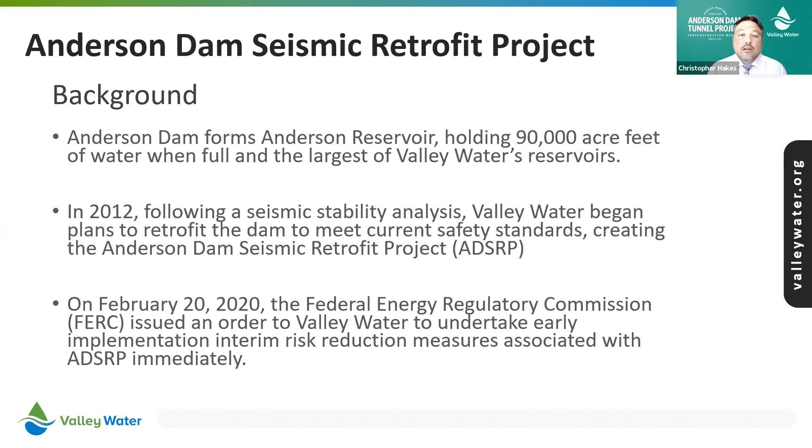I'll cover that soon. The project all changed, kind of accelerated a bit and kind of split in two on February 20th of 2020, when the Federal Energy Regulatory Commission, who is our federal dam safety regulator, issued an order, which I'll cover in a couple slides from now.

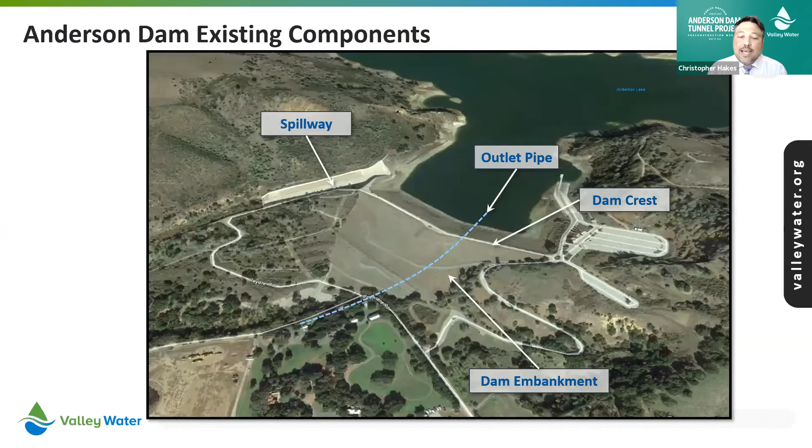It's like trying to maintain your reservoir level. If you thought your reservoir was a big 55-gallon garbage can and your outlet pipe was just a tiny little straw, it's not very effective. So as that's the case, we'll be addressing that as part of this project. The dam embankment there is the earthen portion of the dam. Basically, the dam crest is just the road that goes across the top of the dam.

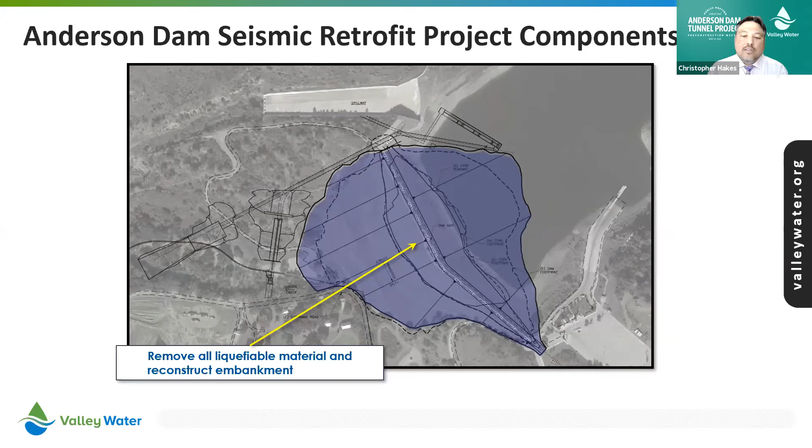So what are we doing in the seismic retrofit project? As I said, initially, we were just going to add some material to the upstream and downstream faces. After 2016, we determined that that was not possible. We're actually going to remove all of the embankment that is liquefiable. So we'll take off all of that soil down to the clay core, which is impenetrable from water, and we'll replace it with suitable material.

We're also going to replace our spillway in its entirety. That was originally not the case. In 2013, we were just going to patch the spillway in place, raise the walls a little bit. But after 2017, some of you may have been familiar with Oroville Dam. They had a catastrophic spillway failure. After that, the Division of Safety of Dams for the state of California kind of looked at all of their spillway design criteria, updated that a bit, and as a result, we are going to replace our spillway in its entirety.

We'll be installing a low-level outlet pipe. Eventually, this pipe will be able to transmit about 6,000 CFS, which is about 12 times the capacity of the existing pipe. But in the interim condition, we're going to limit its capacity to about 2,000 CFS, so about 4 times the capacity.

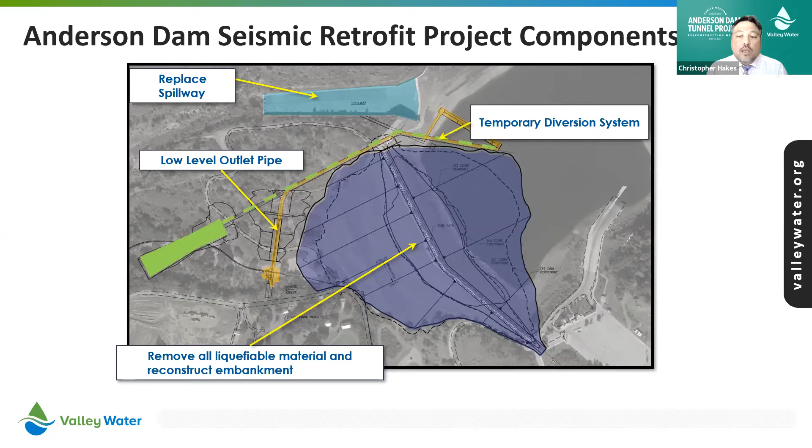As you can see, this pipeline will actually run around the dam embankment through the abutment. That will help prevent any sort of deformations of the dam embankment damaging the outlet pipe. So unlike the existing outlet pipe, which is right under the middle of the embankment, where if the embankment settles, that pipeline will get damaged, this one should remain intact. We'll temporarily put a diversion system in order to drain the dam to construct the embankment improvements.

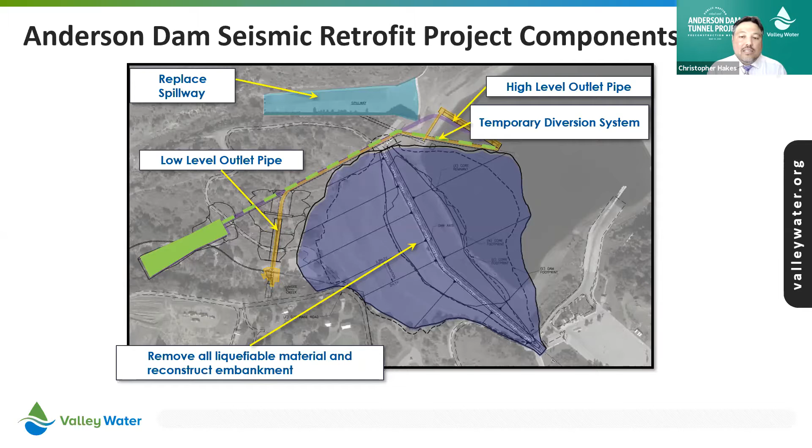And then, of course, we're installing a high-level outlet pipe. One of the advances since 1950 is the requirement from the Division of Safety of Dams, DSOD, for a high-level outlet pipe. This pipe will be able to discharge about 30% of the capacity of the reservoir in 7 days in the event of an emergency, as directed by the Division of Safety of Dams.

So what happened on February 20th? Because of Oroville and the latent risk that FERC, the Federal Energy Regulatory Commission, perceived with the potential for Anderson to fill up, they saw that it did fill up in 2017 and activated the spillway. That's actually how it's designed. It's what we call a fill and spill reservoir. About every 9-10 years or so, the dam will actually fill up and activate the spillway. That's not unusual, and that's not a failure. It's actually acting as it should.

But the potential for the reservoir to get all the way up to its spillway and then an earthquake to happen basically made FERC a bit nervous. They thought that was just too much risk for the downstream community. They had just seen what happened at Oroville. They wanted to go into a very conservative mode.

As a result, they lowered our seismic restriction, which was originally at 592 feet elevation, about 58% of the capacity. It had been there since 2009. They lowered it down to elevation 565, which is about 35% of capacity. That wasn't a big deal. We were in winter operations mode, so we were already at that elevation or lower, because in our winter operations we keep a little extra space for any water that may come in from storms.

The next component was to actually drain it all the way from 565 to 488. That's about 3% of capacity, and that's basically the lowest level that we can drain through the existing outlet pipe. We began that on October 1 of 2020, and by mid-December we were down at our 3% level, which is where we are right now. We might actually be just a bit lower.

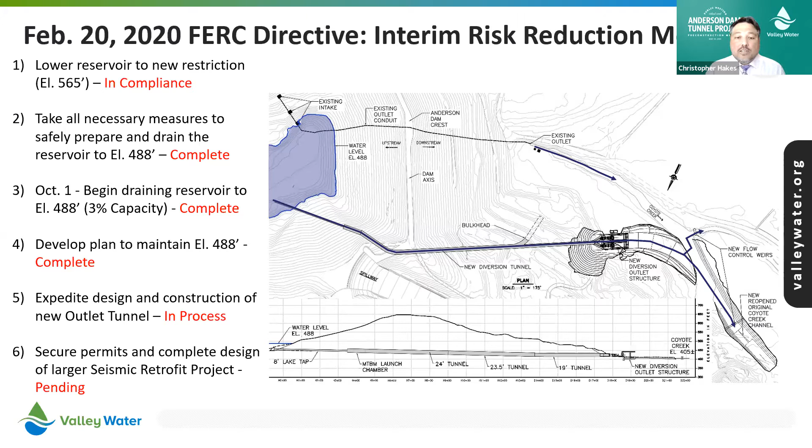So, as a result of that February 2020 action, the district created a new project called the FERC Order Compliance Project. It actually has 11 separate elements, 4 of which are actual construction projects. We'll be talking about one of them today, the Anderson Dam Tunnel construction, which will begin in late spring, basically June. We're going to start groundbreaking in June.

We have awarded our contract to a contractor, Flatiron West, and I've got a slide a little later that shows you their logo. We expect that the contractor will be on site mobilizing in the June timeframe.

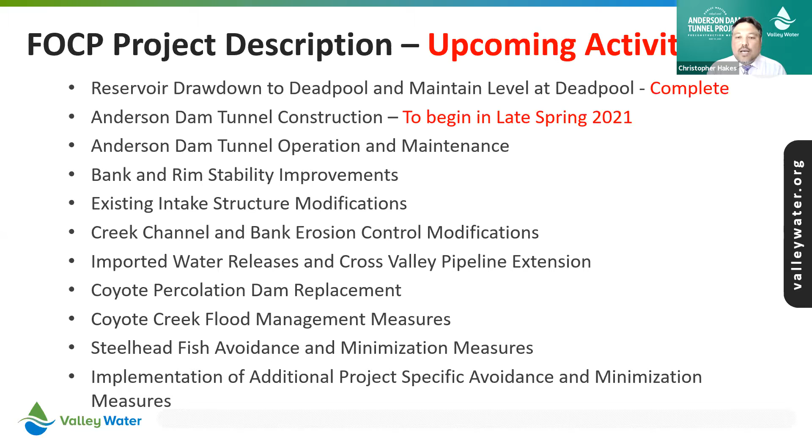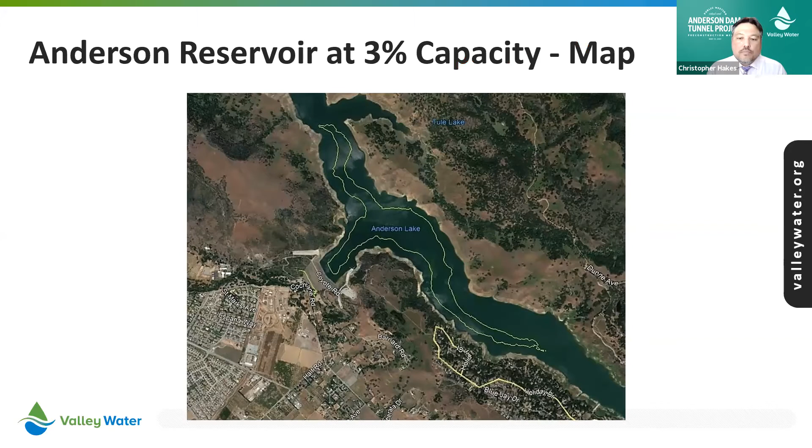One of the impacts of both the tunnel project and the overall seismic retrofit project is that there will be no boating. No water, or 3% of water, equals no boating, and that will be for the duration of both projects, so about 10 years.

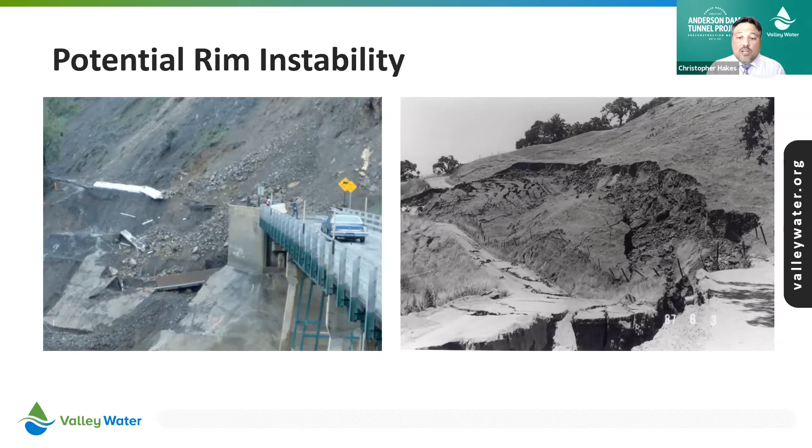Depending on the rate at which we draw water out of the reservoir, there also is the potential for rim instability, landslides. This picture is from 1987, the last time we emptied the reservoir. This time we held it at a net 100 CFS discharge. That was able to equalize some of those pore pressures and prevent some of those landslides. We also intend to go in this summer as part of the Anderson Dam Tunnel project to do some stability measures along here.

Some potential impacts residents may see: after storm events, because our outlet is open, the water level will rise temporarily in the reservoir. Of course, there's no rain forecasted anytime soon, so this is something that you won't see until fall or winter most likely. So you will get some increased flows after storm events.

You'll hear noise from construction equipment, large diesel engines, backup alarms. Sometimes if you are in close vicinity, those alarms can get rather cumbersome, and there are alternate alarms. I've heard at some sites they use what basically is a duck call, but even a duck call will get annoying if you hear it enough.

The work activities will be basically Monday through Friday during the day, kind of 8 to 5 sort of deals. There'll be some Saturday work, and if we do fall behind schedule for any reason, we will extend those work hours. We'll potentially work Sundays. Generally, a notice will go out to the public if those things are happening.

You can also expect some dust from the trucks that are driving along Cochrane. It shouldn't be too bad. There's no one right next to that road; the Borrello estates are a little bit off of that. So because we're digging a tunnel in the other abutment that's away from the roadway, we expect a lot of that noise and dust to be contained within the tunnel itself.

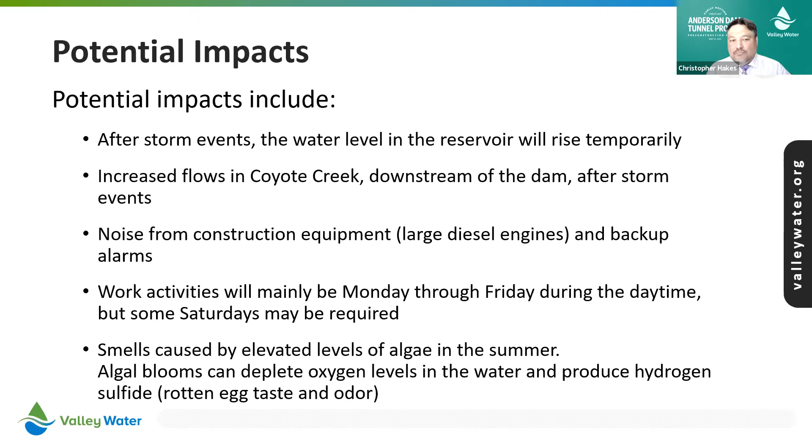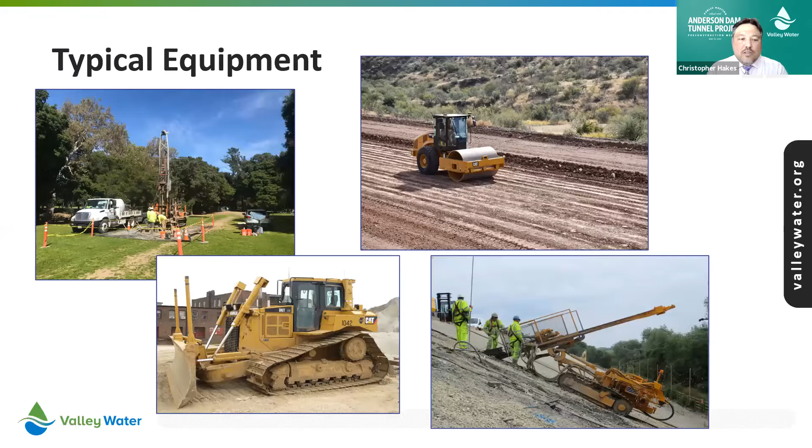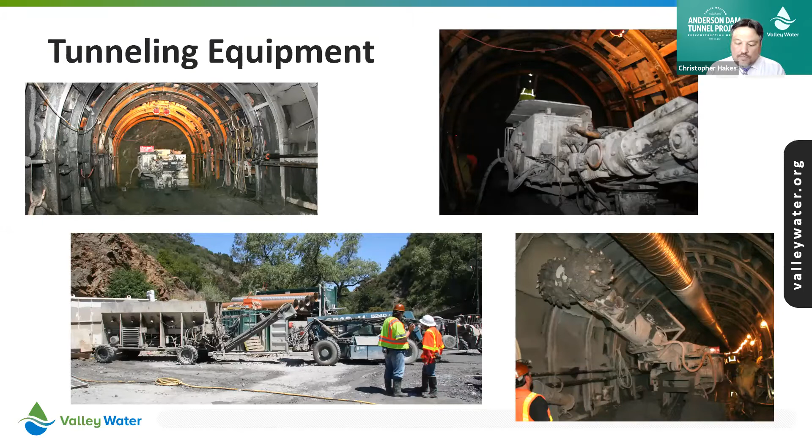Anderson Park is closed. That is for public safety. We closed it as soon as we started the initial draining, because with the lake bottom exposed in some areas, there is some mud that is a little bit dangerous. We actually did have someone who either didn't see the signs or didn't pay attention to them and got stuck out there. So please be careful. Don't go to the construction site. Pay attention to the signage that says the site is off limits, and do not cross any fencing that is up.

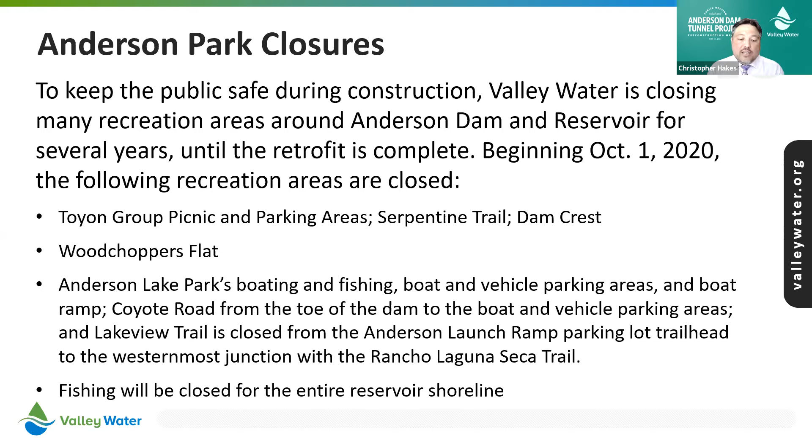Basically, you can see the areas of the county park that are impacted: Toyon picnic areas closed, Serpentine Trail and Dam Crest, Woodchopper's Flat. No boating or fishing, and I think even fishing from the shoreline is closed. There's no water to really fish in. And this is just a map that represents all of the wording that was on the previous slide.

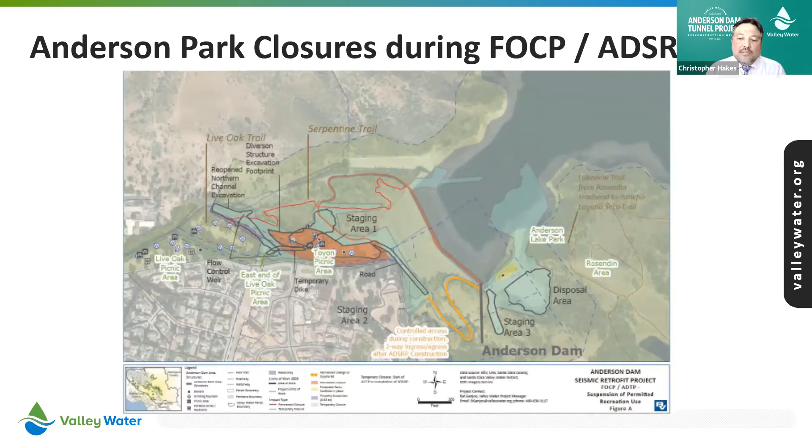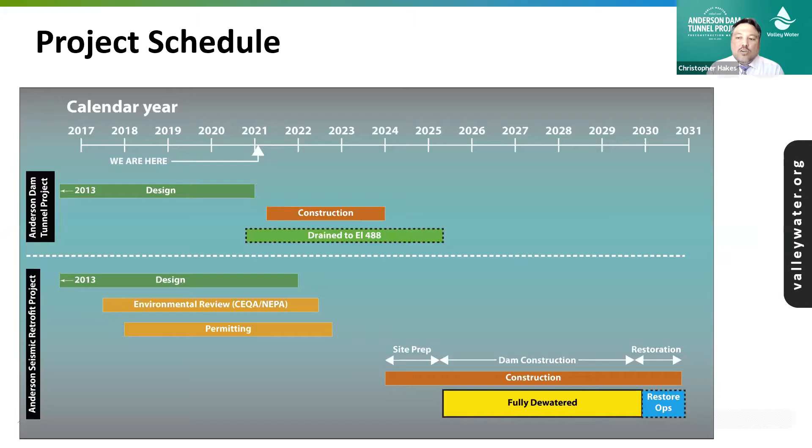As I mentioned, our contractor has been selected. It was through a best value process, so we are very confident in Flatiron's capabilities. And we do have a project representative from Flatiron in the audience today if any questions should come up for them.

And we do have a new website. We call it the Be Heard Valley Water website. You just go to valleywater.org and type in Be Heard. We have a project page for the Anderson Dam Seismic Retrofit Project. It'll have this particular presentation as well as other presentations we've done in the past. It's very interactive. In real time, you can add a comment. It'll go straight to Tony. He'll put it to the correct person. We'll answer you. And if it is something that we think the greater public would also be interested in, we'll post it to the site as well.